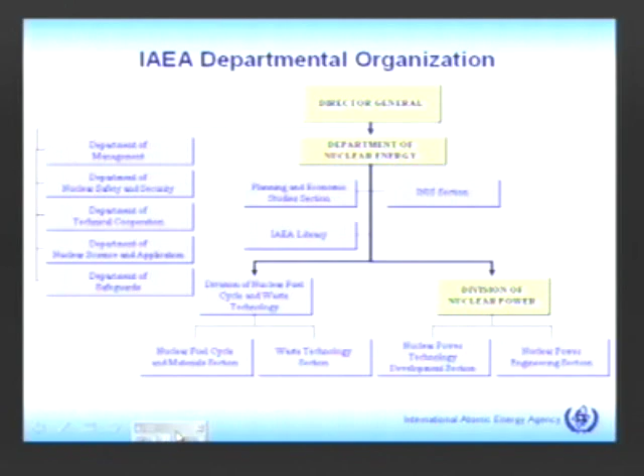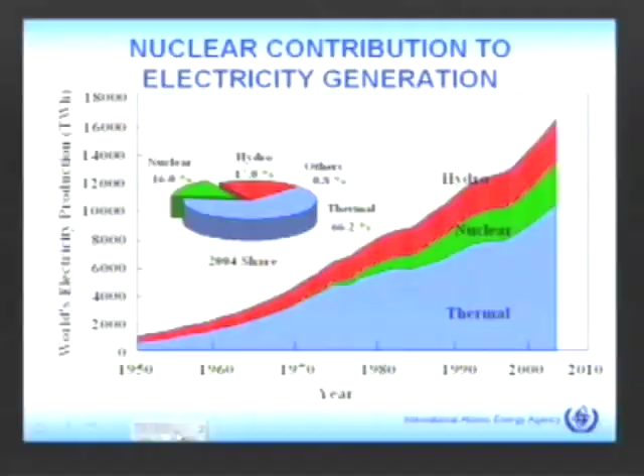Now moving to the main part of my talk. In looking at today's development of advanced reactors, I think it's interesting to start and look at the world's electricity generation since 1950 until now. I chose 1950 because I was a young boy then. In terms of terawatt hours - a terawatt hour is a billion kilowatt hours - in 1950 the world had about 1,000 terawatt hours being generated of electricity per year. Now, just during my lifetime, we have more than 16,000, an increase of more than 16 times. Nuclear today produces 16% of the world's electricity, which is more than the whole world had in 1950.

This shows the numbers of nuclear plants operating in various countries. The U.S. has the most with 104. Globally, there are 441 nuclear power plants with a capacity of 367 gigawatts, and 26 more are under construction.

And significantly, there's been quite a bit of experience: 11,600 reactor years. That's a lot of experience that the industry has.

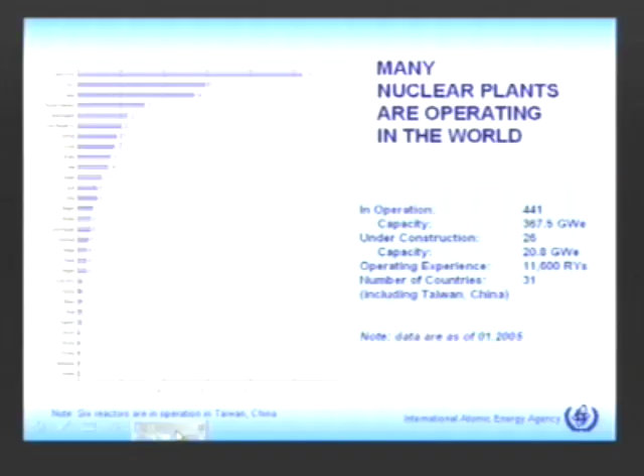Based on information from our member states, we predict that nuclear power will grow. Some countries do have phase-out policies, Germany for example. But other countries see advantages in nuclear power for energy security, electricity price stability, and greenhouse gas reduction. And some countries plan to increase their nuclear capacity, for example China, India, Japan, Republic of Korea, and Finland.

Based on the information on future plans in the various countries that are members of the IAEA, we predict growth from the current value of 2,600 terawatt hours per year to the numbers summarized at the bottom of the chart.

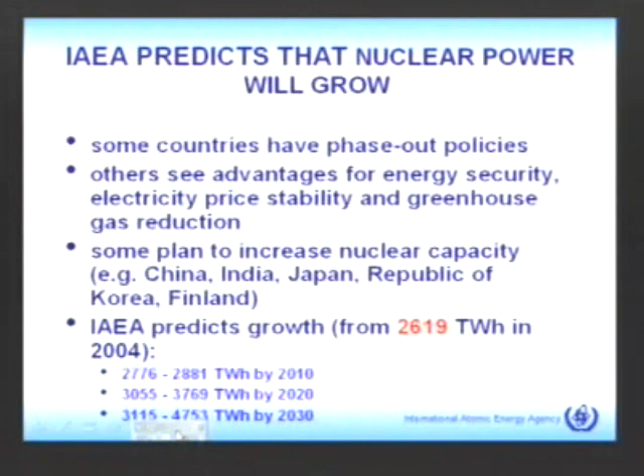Now, we're not the only organization that predicts nuclear power will increase. The Intergovernmental Panel on Climate Change, a scientific advisory group to the United Nations Framework Convention on Climate Change, also predicts nuclear power will grow.

They've analyzed many scenarios, from rapid industrial development in developing countries to slow development, so their ranges for future nuclear capacity are wide, shown by these yellow bars. We simply plotted the median in this black line, and you can see that's a pretty significant increase out to 2050 from today's installed capacity.

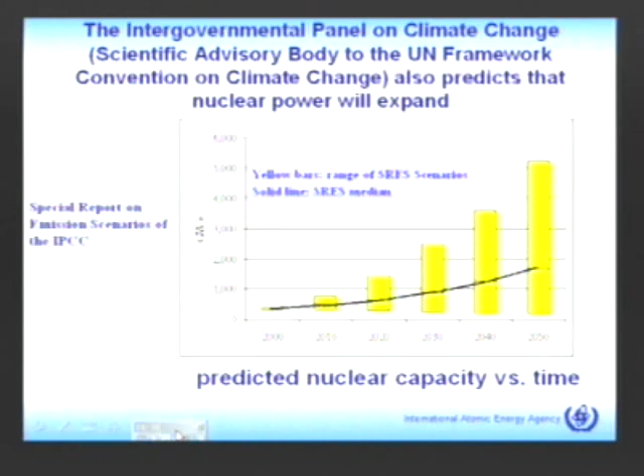But we realize the future is hard to predict, so I thought it would be interesting to list the factors that will influence the future contribution nuclear power makes to electricity production. One factor is the degree of global commitment to greenhouse gas reduction. Certainly important are continued vigilance in safety and safeguards, the maturity of the technology, implementing high-level waste solutions, and public perception and education.

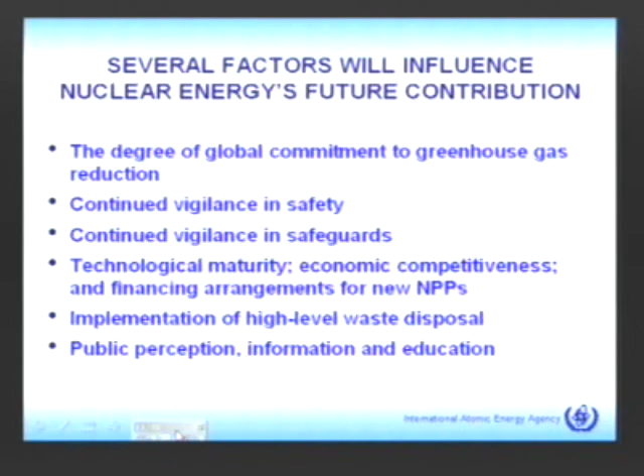I want to say a few things about the economics of nuclear power, because that's an important area for design organizations developing new plants. We did a study recently of the means for improving economics while meeting the very stringent safety requirements we have today.

This was a collaborative assessment involving several industrial organizations and government agencies, and we got good input from the European Commission and also the OECD Nuclear Energy Agency.

We took a quick look at the economics of current plants, and we find that in general they're operating very well. Many have already been paid for, they're amortized, so they can generate power simply by buying the fuel and paying for operation and maintenance costs. They don't have to pay for their capital costs, that's already paid. Many are achieving high availability.

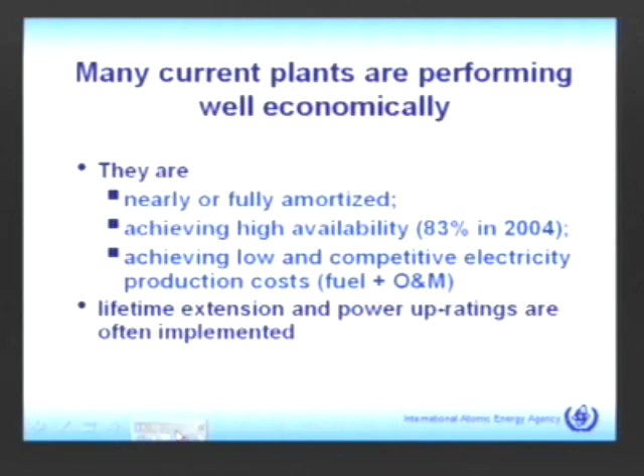The global average availability in 2004 was 83%, and the U.S. did even better at 92%. These plants are achieving low and competitive electricity production costs, meaning fuel costs and operation and maintenance costs. So in the U.S., but also in other countries, lifetime extension and power uprating are pursued because these plants are performing so well.

But you also realize there are fewer nuclear plants being built. I tabulated here: during the 1970s, there was an average of 25 construction starts per year. Then back to 1998, you see construction starts per year are 3 or 5 or 6 or 1. This year there have been 2 starts up until August of 2005, one in Pakistan and one in Finland.

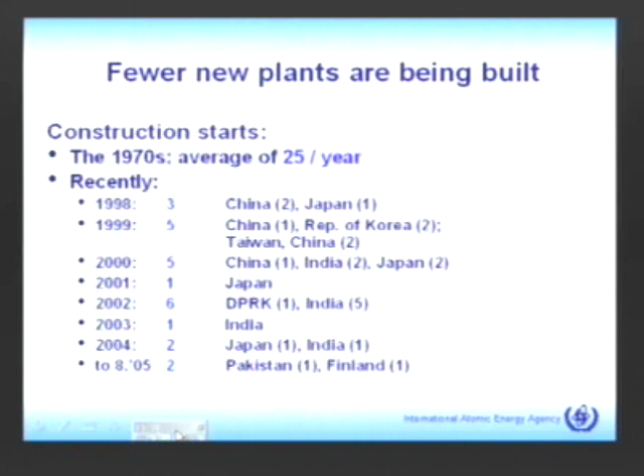So for new plants, there are economic challenges. The market deregulation in some countries means owners of those plants are no longer guaranteed they can pay for their plants through a long period of regulated rates. It's a competitive industry now.

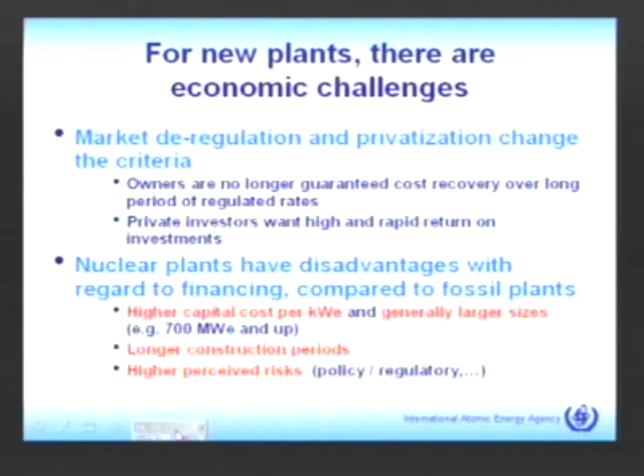And nuclear plants have disadvantages with regard to financing compared to fossil plants. There are 3 factors contributing to that. First, most nuclear plants are large, meaning above 700 megawatts, which is the IAEA definition of a large-sized plant.

Of course they cost more per kilowatt electric, so when you combine that large size with the higher capital cost per kilowatt electric, you get a lot of money that needs to be financed when an owner wants to buy a new plant. Secondly, nuclear plants take longer to construct than fossil plants, and they do have higher perceived risk, either from changing government policies or regulatory delays. So they have these disadvantages with regard to financing.

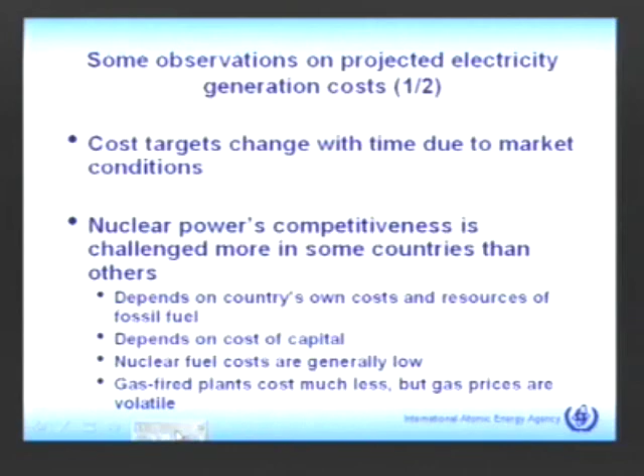Some more observations. The cost targets for what is competitive for nuclear plants against fossil alternatives actually change due to market conditions. A good example is the United States. Back in the mid-1980s, the Department of Energy started the Advanced Light Water Reactor program, and at that time we thought the target to be competitive was about 4.3 cents per kilowatt hour. By the time those plants got developed and certified by the Nuclear Regulatory Commission, the target had dropped toward 3 cents per kilowatt hour. So targets do change with time, and it depends on conditions in each country. Some countries can be more competitive than others because of what they have to pay for fossil fuels and various factors. It's a country-dependent kind of thing.

Some more observations. In this assessment, the experts concluded that electricity production costs—fuel cost and operation and maintenance costs—are not likely to fall much below the current best experience of 1.1 to 1.2 cents per kilowatt hour. So design organizations have clearly focused on reducing capital cost. A lot of design organizations now say their target is about $1,000 per kilowatt electric for capital cost. That's an overnight cost, which does not include interest on money borrowed during construction, and doesn't include owner's costs. But the target of about $1,000 per kilowatt would meet about 3 cents per kilowatt hour, which is agreed to be very competitive with fossil alternatives.

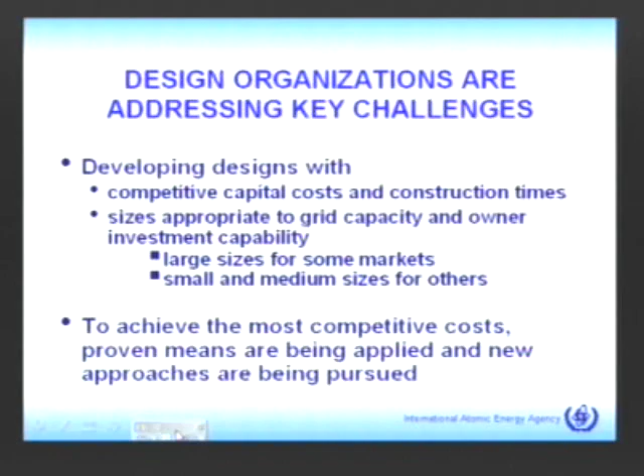The design organizations are working to meet those challenges. They're developing designs, trying to have competitive capital costs and short construction times. They've realized that one size doesn't fit all. Some markets, like France or Finland, need large size plants. But in other markets, as we see from Vienna, some developing countries are interested in small or medium sized plants. Our definition of small is 300 megawatts and below, and medium is between 300 and 700. So design organizations are developing plants throughout those ranges. They realize that to achieve competitive costs, they have to apply proven means the industry has already learned can keep capital costs down, but also pursue new approaches to reduce cost.

This expert group has examined that. Back in 2000, the OECD Nuclear Energy Agency produced a very good report reviewing proven means for reducing capital cost of new plants, and you've probably seen these kinds of lists before. Certainly countries moving forward with nuclear power are doing it through standardization, designing a plant and building replicates. Japan is doing that, Korea is doing that, India is doing that. That's a proven means for keeping cost down.

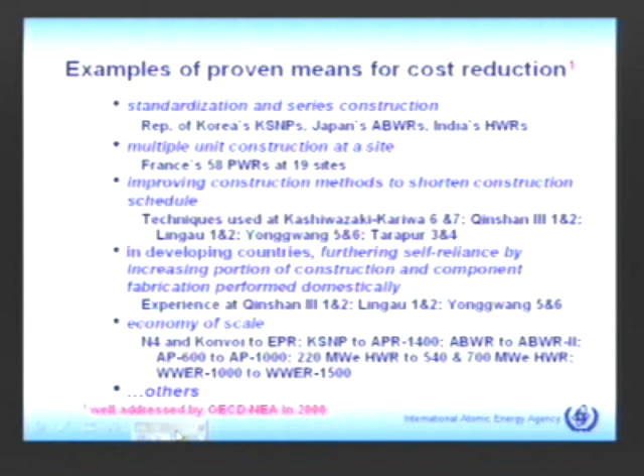Building more than one unit at a site is also a proven means, taking advantage of the workforce, their knowledge and training. France is a good example—they built 58 pressurized water reactors at 19 sites. I've mentioned keeping the construction schedule short, meaning good techniques for constructing the plant. I list some recent plants that started up since the mid-1990s, and they all achieved very good short construction schedules. Something important to developing countries that we see in Vienna: when a developing country buys a nuclear plant from a vendor in another country, they like to increase self-reliance by building some components and systems domestically. That helps them keep costs down.

Also, economy of scale is a key way to achieve competitive capital costs. You see that in countries moving forward with nuclear power. In India, they have a series of 220 megawatt electric units, and they recently started up a 540 megawatt electric unit, which gave them economy of scale. They're doing design work on a 700 megawatt electric unit.

The European Pressurized Reactor, developed by France and Germany, takes advantage of the most recent series of pressurized water reactors in those two countries to develop a larger size plant. That's also true in Korea—they've used economy of scale from their standardized 1,000 megawatt electric plants, and now they're planning to build a 1,400 megawatt electric plant. It's true in the United States too: Westinghouse has certified their 600 megawatt electric passive reactor, the AP600, but to get economies of scale, they're working on certifying a 1,000 megawatt electric plant.

But we also took a look at what are these new approaches that are being pursued. One that you hear about a lot for small and medium-sized reactors is to modularize the systems, to build them in a factory so that they can have short construction time.

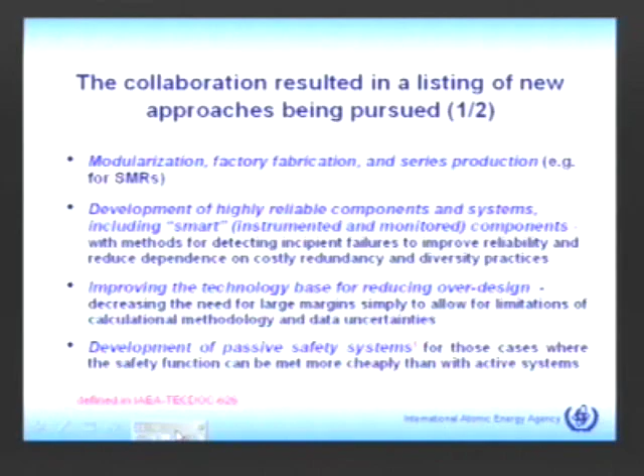And one approach that many organizations are pursuing is to develop passive safety systems for new reactors, where the passive systems are based on natural laws of physics instead of active pumps and components that can operate in case of an emergency. But for those cases where the safety function can be met more cheaply, some design organizations are pursuing passive systems.

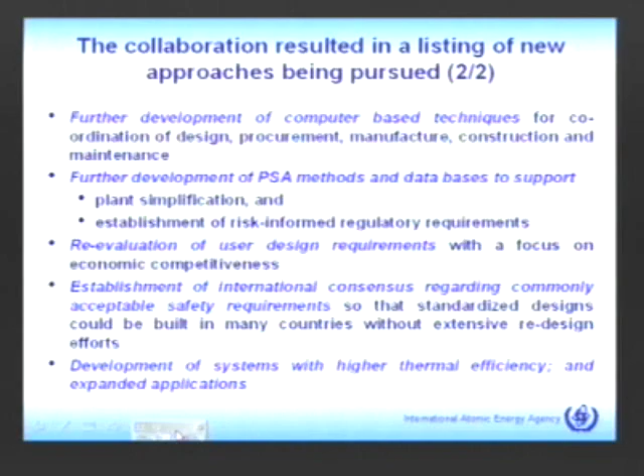And finally, development of systems with higher thermal efficiency. I'm going to give you some examples of that. And expanded applications, I'm going to also give you some examples of that. Okay, let me move now to some examples.

Development of advanced designs, that's going forward for every reactor type: light water reactors, heavy water reactors, gas-cooled reactors, and fast reactors. It's often guided by what we call user requirements documents, where utilities will come together and write what they would require for the next plant.

The new designs incorporate the large experience I mentioned from the current plants, over 11,000 reactor years of experience. They also incorporate technology advancements and results of R&D.

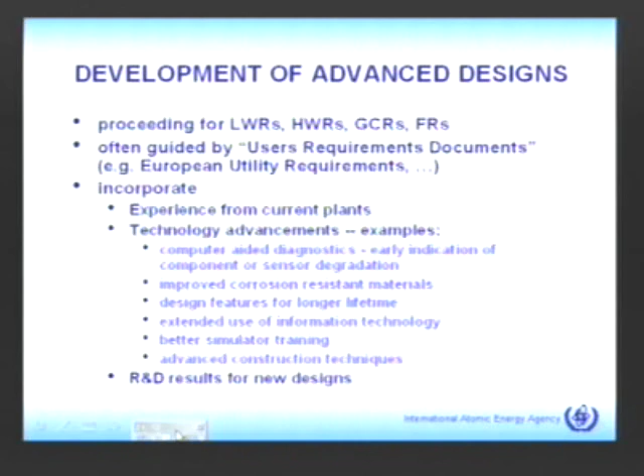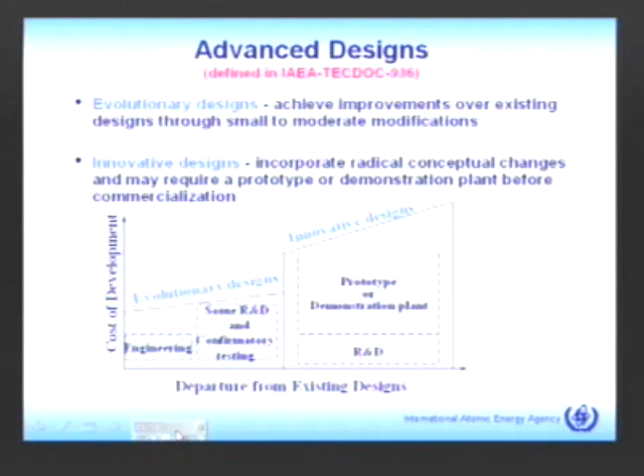When we speak about advanced reactors, and our definition is pretty much accepted by organizations around the world, we break that into two categories. We speak about evolutionary designs, which achieve improvements over current plants through some small to moderate changes based on experience. And then we speak about innovative designs, which are more radically different from today's plants, but they may cost more to develop, and they may require a prototype or a demonstration plant before they can be commercialized. I'm going to give you examples of both of these.

And when you study the design approaches that the design organizations are taking, you can see that they're meeting very stringent safety requirements. There's a reduction of the operator burden, the operators not needing to react so fast as they would have in the past. There's incorporation of either highly reliable active safety systems, or in some cases, designers are pursuing this new approach, passive safety systems. They're all pursuing to reduce the core damage frequency.

The new designs have a very, very low core damage frequency that's predicted. And they're trying to assure that there's very low releases in the event of a severe accident, so that the emergency planning can take that into account.

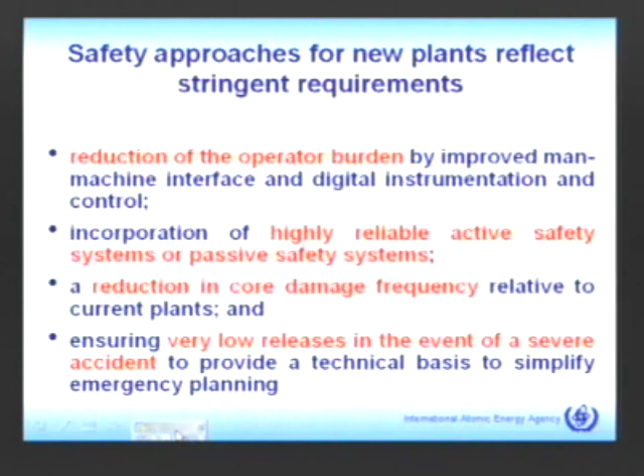Well, I wanted to list here several evolutionary light water reactor designs. There's a lot of work going on around the world on these plants. I won't go through each one, but I wanted to show the countries that are doing this work toward evolutionary water-cooled reactors, light water reactors, and the organizations involved, the industries involved.

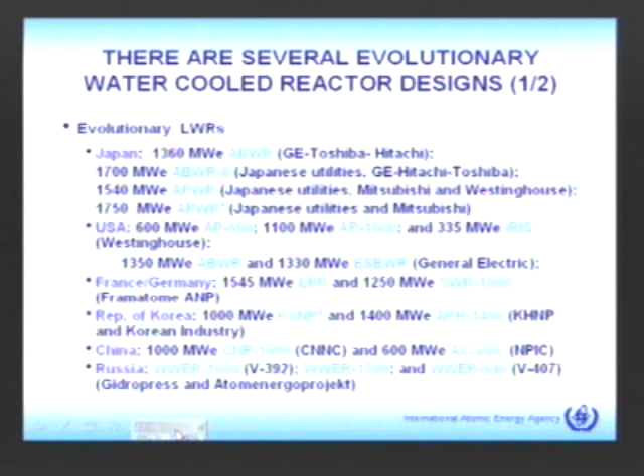Just to point out, in the United States, the AP 600 megawatt electric passive plant by Westinghouse and the advanced boiling water reactor by General Electric have been certified in the late 1990s by the U.S. Nuclear Regulatory Commission. And now Westinghouse is working to certify by the end of this year to scale up the AP 1000. And General Electric is working to get a design certification for their ESBWR, which is a passively safe plant. But this kind of work is going on in many countries, as you see here.

That was for light water reactors. This chart is for heavy water reactors. The development work on heavy water reactors is done mainly in Canada and in India. Atomic Energy of Canada is working on an advanced CANDU reactor that's light water cooled and heavy water moderated. And India, I believe I mentioned already, has recently started their first evolutionary 540 megawatt plant, which was based on their successful 220 megawatt electric series. And they're doing design work on an evolutionary 700 megawatt electric plant.

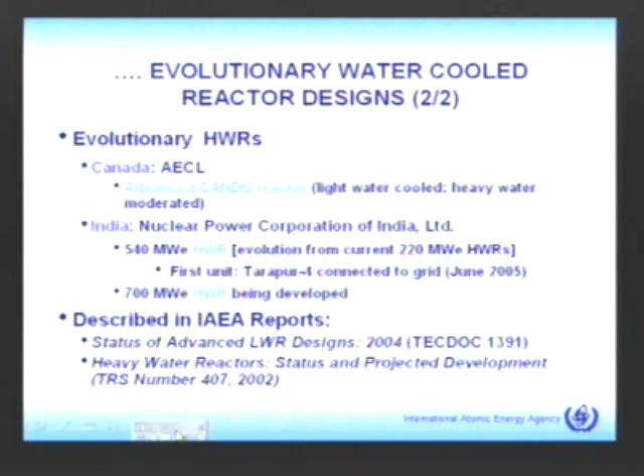I want to give some more examples here of the advanced boiling water reactor that's been developed by General Electric, Toshiba and Hitachi. Development of advanced plants takes quite some time. The development of this plant started in the 1970s because the Japanese had a very strict principle of testing new features before they were incorporated into the design. Even if those new features might have been used in another plant somewhere else in the world, they were sure to very carefully test any new feature because they wanted their plant to operate with high availability once they built it.

I list some of the key developments: reactor internal pumps, I'll show you that, and a higher improved efficiency turbine. Now the U.S. version of this advanced boiling water reactor was certified in 1997 by the Nuclear Regulatory Commission.

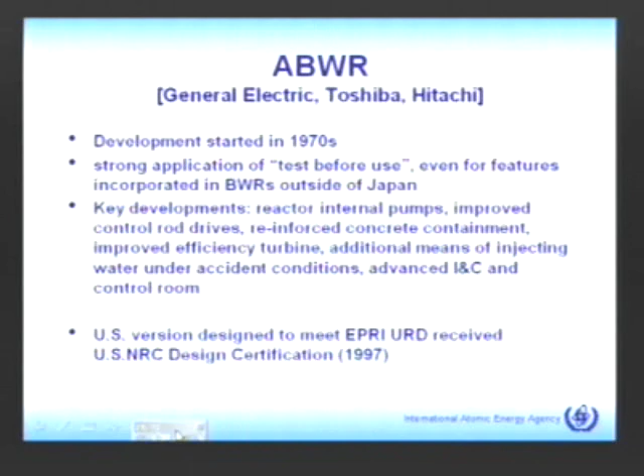Actually, these advanced boiling water reactors are becoming a standardized series in Japan. Right now there are 3 plants operating. The first one started in 1997, Kashiwazaki Kariwa Unit 6. Recently, this year, Hamaoka 5 started up, and there's a 4th one that's been connected to the grid and will go into commercial operation soon. So they're becoming a standardized series.

And more projects are underway in Japan. There are 8 more projects for advanced boiling water reactors that are in various stages, ranging from planning to environmental impact statement being submitted or the construction permit issued. And there are 2 more under construction in Taiwan, China.

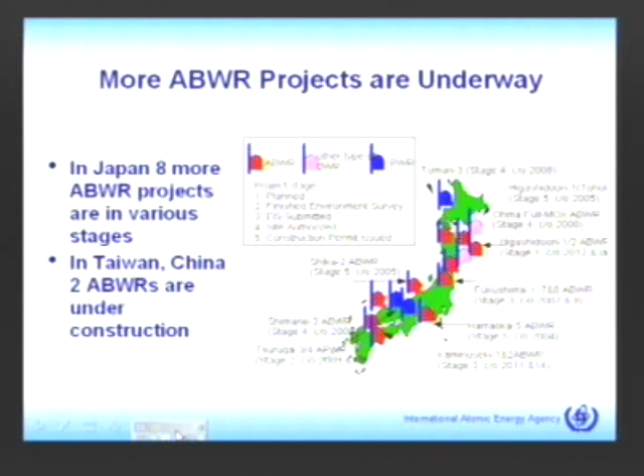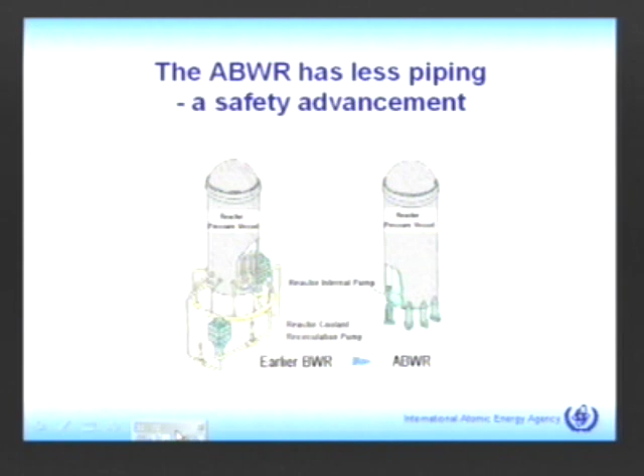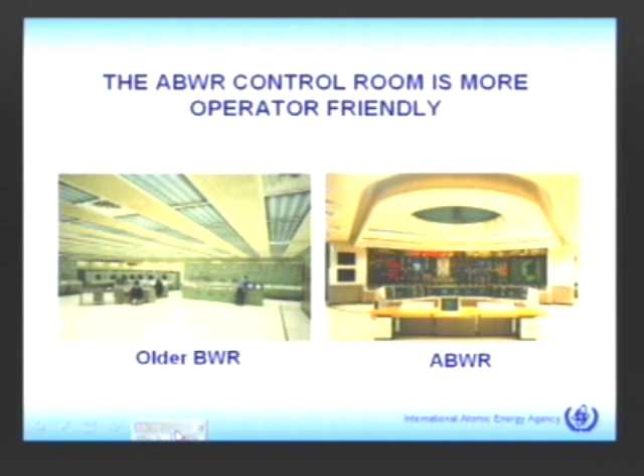And they achieved a 48-month period from pouring first concrete to start of commercial operation. This is all good for the economics of the plant, because then they begin to get the revenue much quicker.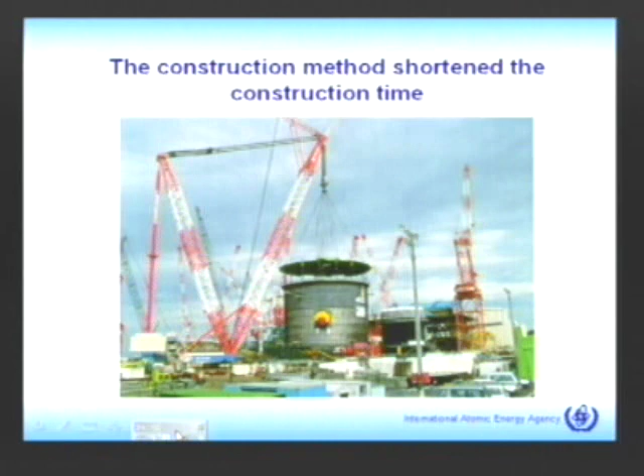And because of the good experience they've had with the ABWR, these are 1,360 megawatt electric units. They've already started work toward their next evolution, an evolutionary design we call ABWR2, which would be at 1,700 megawatts electric. This is an activity of TEPCO and 5 other Japanese utilities working with reactor design organizations. Their goals are to reduce the capital cost, reduce the construction time, also make them more flexible for use of different fuels, mixed oxide, plutonium-uranium mixed oxide. And they see that these can be introduced commercially in the late 2010s.

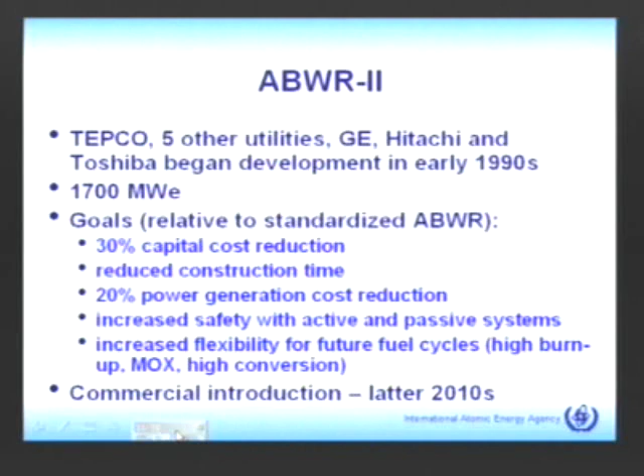I mentioned that some design organizations are utilizing passive safety systems. The ABWR2 is one example where it has a passive core heat removal system and a passive containment cooling system. It doesn't require any emergency diesel generators or emergency pumps to act. It can either cool the core in the case of the core heat removal or cool the containment just by natural circulation.

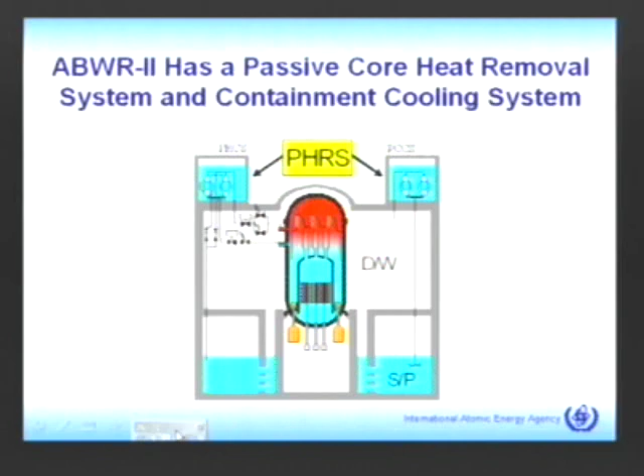I want to move now to Europe. Framatome has developed the European pressurized water reactor at 1,545 megawatts. It relies primarily on well-proven active systems to achieve a high level of safety. It has 4 independent 100% capacity emergency core cooling trains.

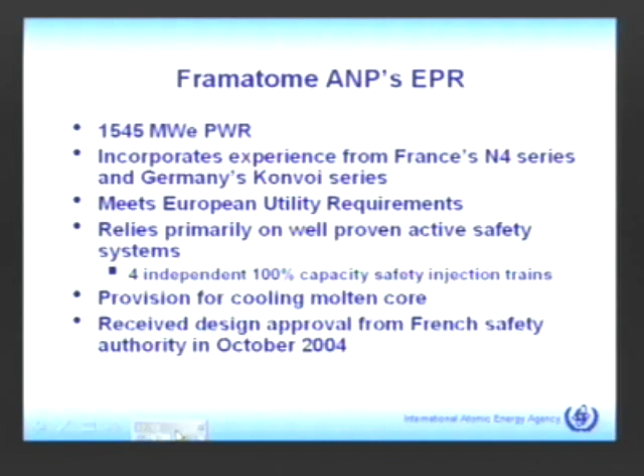It even has provision for cooling a molten core in the very, very unlikely event that the core should melt. I'll show you a picture of that. And it's been approved by the French Safety Authority in October of last year.

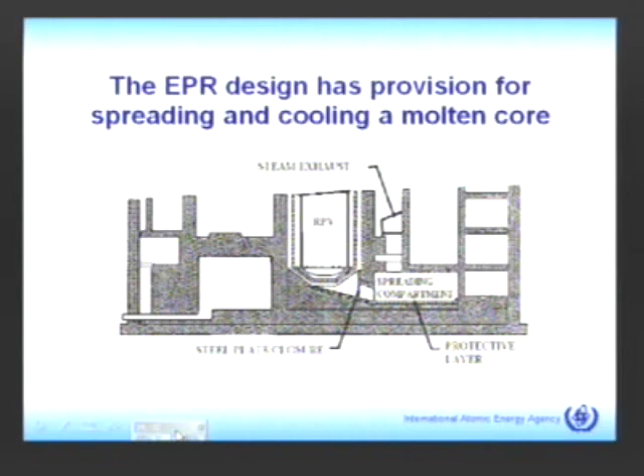This is a picture of their severe accident management system. It's very, very unlikely that the core would melt because of all their emergency cooling trains and their highly reliable systems. But in the event that it would melt and melt through the reactor vessel, they have a spreading area where they can spread the core and maintain it in a coolable geometry. So they've really taken very, very extreme steps to protect against accidents.

And we're excited in Europe because now these plants are actually becoming a reality. I show on the left side of this slide the picture of the first European pressurized reactor being built in Finland. I have a picture here of the site excavation. In the background, you see the existing 2 boiling water reactors at that site. And the first concrete was poured in July of this year, so the construction has started. On the right side, there's an artist's concept of what it will look like when it's complete.

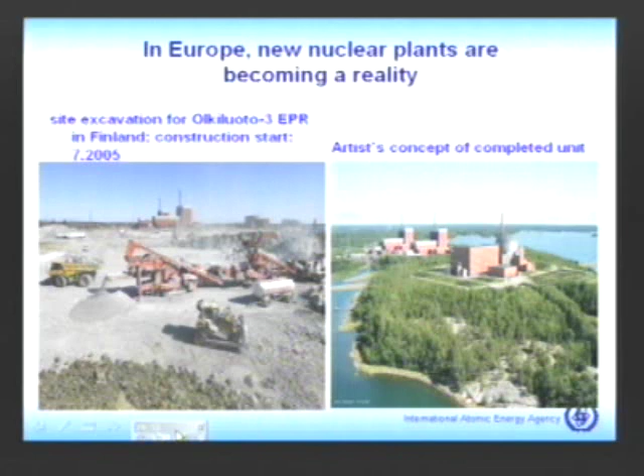I mentioned earlier in my presentation what are the reasons for nuclear power in the future. TVO, the utility that's going to operate this new plant, already operates the 2 BWRs that are there. They've publicly stated the reasons that supported their decision to buy a new nuclear plant. I thought it's interesting to take a look at that.

They said it covers partly the additional electricity demand, and they need to replace some old fossil-fired power plants. Importantly, part of their decision was to meet their Kyoto commitments for greenhouse gas reduction, because nuclear plants don't produce any greenhouse gases. So they actually stated that as one of their key reasons.

I mentioned earlier that nuclear power can provide stable electricity prices. That was one of their reasons. And they wanted to reduce their dependence on electricity imports, sort of an energy security approach.

Moving now to Korea. They're scaling up from their standard pressurized water reactor, which is 1,000 megawatts. They've designed a 1,400 megawatt electric plant. It's been certified by their regulatory agency, and they plan to construct the first 2 units at a site called Shinkori.

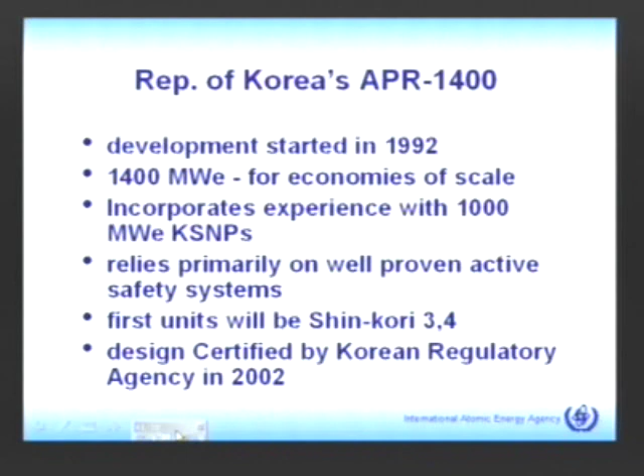Moving to the United States, I mentioned already the passive design, the AP600. This was developed by Westinghouse during the Advanced Light Water Reactor Program of the U.S. Department of Energy, and certified by the regulator. Their key developments include passive systems for the various safety functions. In the very unlikely event of a core melt accident, they can even retain the molten core inside the reactor pressure vessel. And they have demonstrated these new passive systems by test.

Similar to what the Japanese did with their ABWR, they wanted to very thoroughly test the systems before actually incorporating them into a new plant, because that's important. You don't want the new plant to operate at some low availability just because you didn't very well test the system. I mentioned that they realized that they needed to pursue economy of scale to meet competitive cost targets.

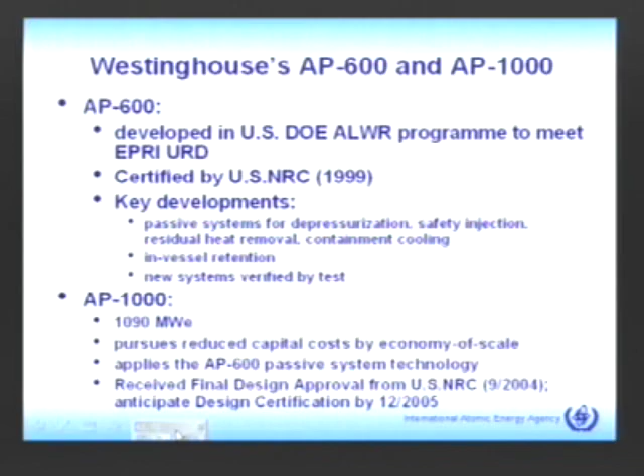Therefore they're in the process of getting their 1,000 megawatt electric plant certified by the Nuclear Regulatory Commission. They apply the same passive system technology that they had developed already for the AP600, and they expect to have that certified by the U.S. Nuclear Regulatory Commission by the end of this year.

This shows a diagram of one of their passive systems for cooling the containment and condensing the steam inside the containment in the event of an accident, a loss of coolant accident where steam is injected into the containment. It's a natural circulation system of air coming in and cooling the containment wall just through natural circulation. That can be enhanced by a water spray on top of the containment. So it's completely passive, it doesn't need emergency diesel generators or emergency pumps to operate.

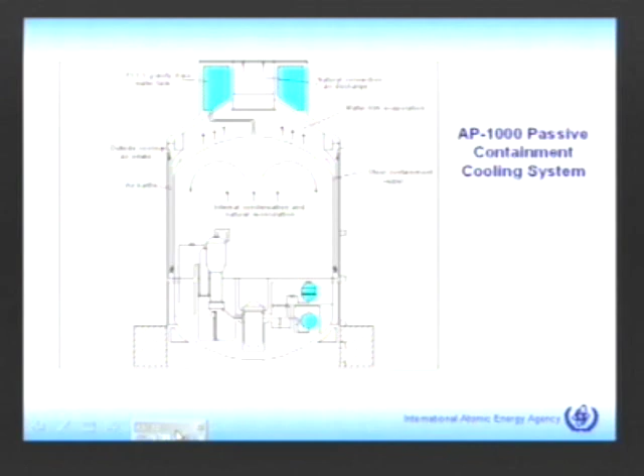Several design organizations are taking that approach. What I've said now has dealt with what we call evolutionary reactors. Now I want to give you some examples of innovative reactors. That development is also going on for every reactor type: light water, heavy water, gas-cooled, and fast reactors.

A lot of the designs that are innovative are in the small to medium size range, up to 300 or between 300 and 700 megawatts electric. The reason for that is developing countries may want to start with a small to medium sized reactor. They're smaller, they're easier to finance. So that's a factor in some developing countries that want to start a nuclear power program.

Nuclear power in the U.S. was started with small reactors. They can have a simple design because they're small. They can employ passive safety systems. And many developing countries see these as something that they could use for what we call non-electric applications.

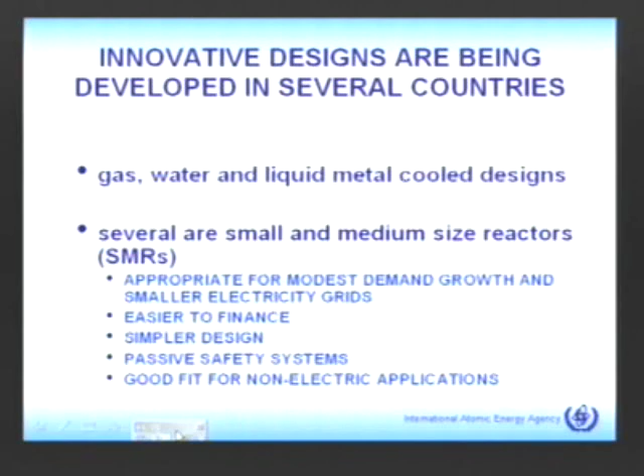I'm going to give you some examples of applications of nuclear energy beyond making electricity, which I've talked about up until now. But first, let me give you some examples of some innovative water-cooled reactors.

One type of innovative water-cooled reactor is a design for conversion of thorium-232 to fissile uranium-233, or for conversion of uranium-238 to plutonium. I give two examples here. This is to address energy sustainability goals. If you can breed a lot of new fissile material from the fertile thorium-232 or uranium-238, that can help countries meet their sustainability goals.

One example is India's work on what they call their advanced heavy water reactor. They intend to fuel that one with thorium oxide so that they can breed uranium-233 as a fuel. They have a lot of thorium deposits in India.

This is a vertical pressure tube design. Normally, heavy water reactors have a horizontal pressure tube. These pressure tubes are vertical so that they can achieve core cooling during normal operation by natural circulation.

Other designs for high conversion are being developed in Japan. Those are being developed to convert uranium-238 to plutonium, and they're building on the experience of the ABWR. They changed the core lattice, but they keep the balance of plant similar to what the ABWR has because they've had good experience with the ABWR.

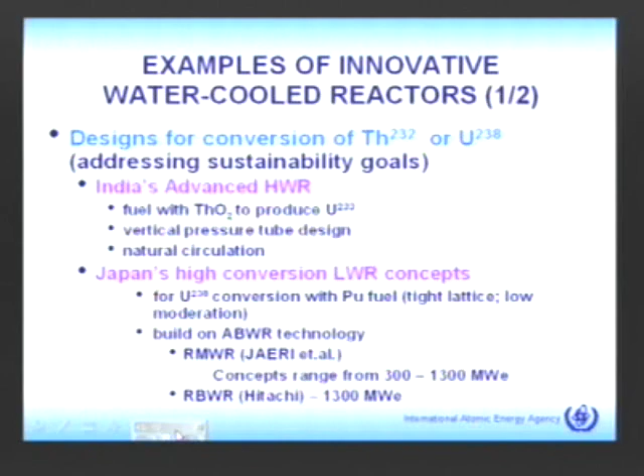Some more examples of innovative plants, what we call integral designs. These are small to medium-sized plants where the reactor core and the steam generator are in the same reactor vessel, instead of having the steam generator in a different vessel. Several countries are developing integral designs: Korea, Argentina, Russia, and Japan.

Westinghouse is also developing an integral design, but they claim it's evolutionary instead of innovative because they believe they won't need to have a demonstration plant before they commercialize it, so that's why it's not listed here.

But these integral designs are generally small. That means below 300 megawatts. And I'll show you that some of them are designed for both electricity production and seawater desalination.

But another innovative design is a water-cooled reactor that operates thermodynamically above the critical point of water. That's above 22 megapascals and 374 degrees Celsius. This is an approach pursuing higher thermal efficiency. This approach promises higher thermal efficiency in the range of 44 to 45%, compared to current day light water reactors that have between 33 and 35%.

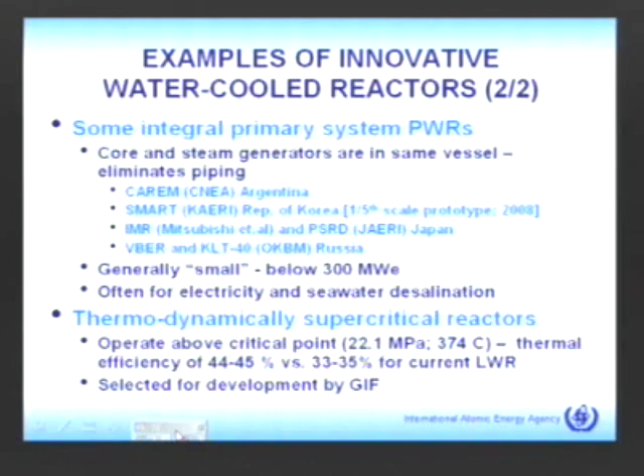In fact, this is a design that's been selected for development by the Generation 4 International Forum, a development program, which I'll tell you about in a moment.

I want to move now away from water-cooled reactors and talk about the other reactor types: gas-cooled and, in a moment, fast reactors. With regard to gas-cooled reactors, there's a reasonable number of years of experience, 1,565. In fact, most of the nuclear electricity in the United Kingdom is generated by their 26 gas-cooled reactors. These are cooled by carbon dioxide. These carbon dioxide cooled reactors have also operated in some other countries, as I list.

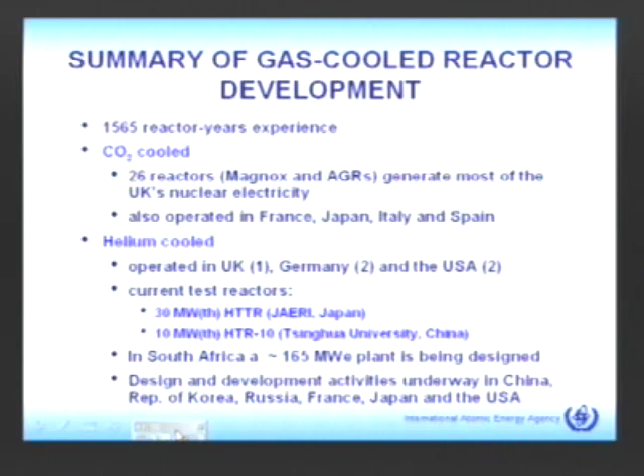More recently, the development work has been on helium-cooled reactors. Helium is an inert gas, and therefore you can operate reactors at higher temperatures, and there's no reaction with the core structure as there would be with carbon dioxide. There have been 5 of those reactors that have operated. Those are now shut down, but there are 2 test reactors that are operating, helium-cooled, high-temperature test reactors. They operate up to 950 degrees Celsius.

One is a test reactor in Japan, I'm going to show you a picture in a moment. And another one is a test reactor in China. There's also work in South Africa, I'm going to show you a picture. They're developing a small-sized plant with helium coolant. And I list some other countries where development work is also going on.

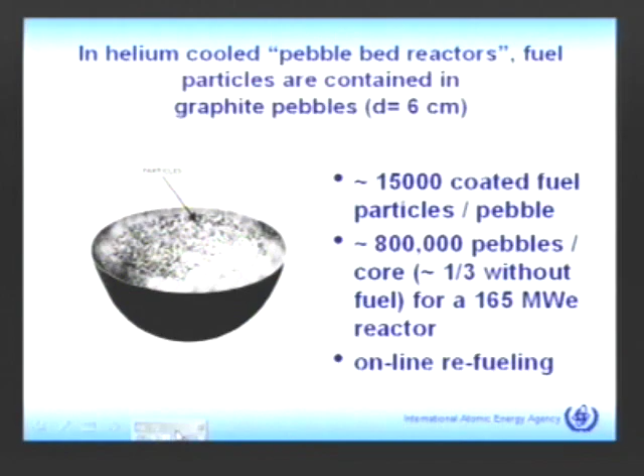You may have heard about the pebble bed version of these high-temperature gas-cooled reactors. This shows a picture of the fuel. The fuel is contained in billiard ball size graphite pebbles. The fuel itself is in very, very small particles, 15,000 per pebble, and it has coatings on it which will retain the fission products up to high temperatures. So that's one way that these reactors get a very high degree of safety, through these coated fuel particles that can retain the fission products.

A small plant would have very, very many pebbles. And another factor that you often see about these plants, they can be refueled online. The pebbles are put in at the top of the core, and pebbles are then taken out later on at the bottom of the core.

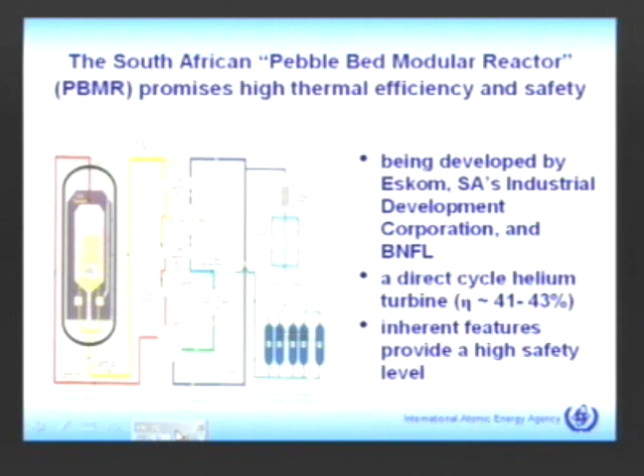This is a picture of the design being developed in South Africa. It's different than a light water reactor that makes steam to go to a turbine. This takes the hot helium, at, for example, 850 Celsius, and it goes directly to a helium turbine. And this gives a higher thermal efficiency than the light water reactors. They predict a thermal efficiency of 41 to 43%.

And they do promise a very high degree of safety. Number one, because of these coated fuel particles that can withstand high temperatures. Number two, because the core has a lot of heat capacity in it, a lot of graphite that heats up very slowly because of this large heat capacity. They also have a very low core power density, on the order of 6 watts per cubic centimeter, compared to today's light water reactors, which have about 100 watts per cubic centimeter.

Okay, I want to turn now to fast reactors. The history with fast reactors: there were test and experimental reactors operated in the countries I listed. This led to demonstration and prototype liquid metal cooled reactors that have operated in several countries: France, UK, Kazakhstan, Russia, Japan, and France. The French plant was a large size plant at 1,200 megawatts. It's recently been shut down and it's being decommissioned.

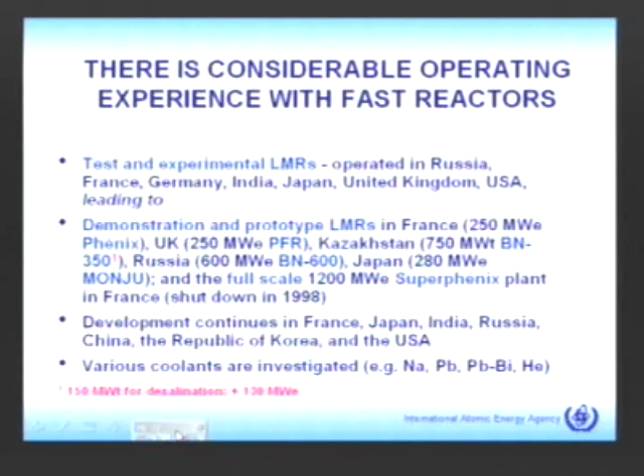The development work continues, and various coolants are investigated. Most of these fast reactors are designed and have operated with sodium coolant, but also lead and lead bismuth eutectic, and also gas helium is being examined as a coolant for fast reactors.

This chart just summarizes the work in various countries. Some of you may remember that the Monju plant in Japan was shut down due to a sodium leak in 1995. The Japanese now are planning to restart that plant in 2008. India is operating a test reactor and constructing a larger prototype plant. Russia is operating a plant. I'll show you a picture of some construction in China. The US and Korea are developing fast reactors also.

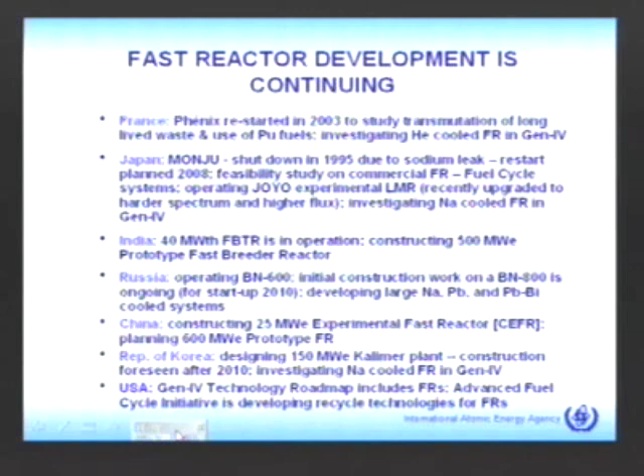And we see various roles for fast reactors. The traditional role was to breed fissile material, either by converting U-238 to plutonium or thorium-232, converting it to uranium-233. Fast reactors are also good for incinerating plutonium, and they're good for transmuting the long-lived radioactive waste, both the fission products and the actinides.

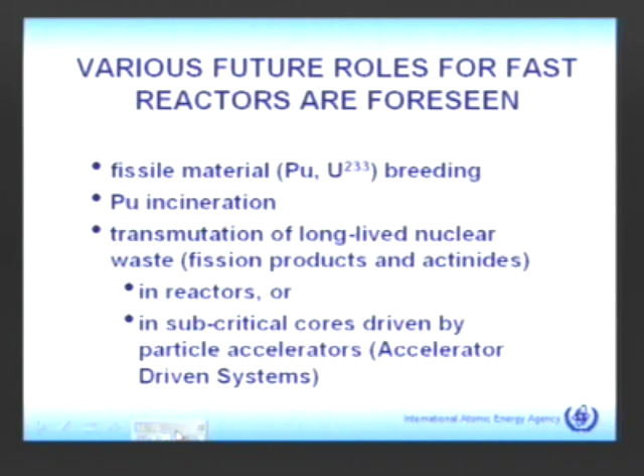That can be done either in a fast reactor or in what we call an accelerator-driven system, where the reactor core itself is subcritical, but it receives a particle beam to create neutrons and bring it to the critical state.

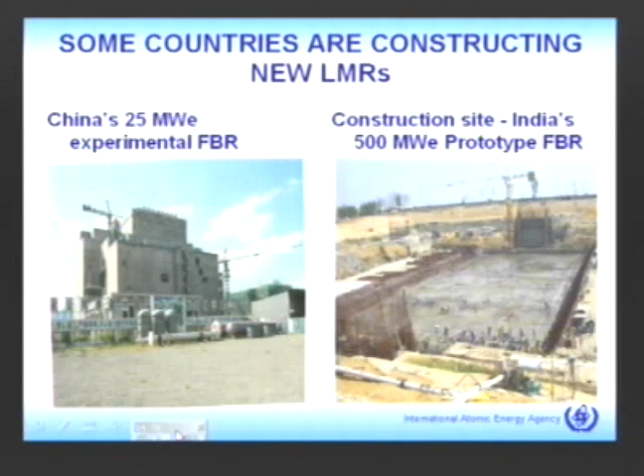I want to talk about two international efforts that are underway on advanced nuclear energy systems. The first is the Generation 4 International Forum that was started in 2000 and involves, I believe, 11 countries, mainly industrialized countries, including the US, of course.

They're developing new systems. They've stated what their goals are. Their goals come in 4 areas: sustainability, safety, good economics, proliferation resistance, and physical protection.

And they've actually developed a technology roadmap and selected 6 systems to develop cooperatively, working together, to be ready by 2030. Those systems are a gas-cooled fast reactor, a lead or lead bismuth cooled fast reactor, a sodium cooled liquid metal cooled reactor, the supercritical water cooled reactor that I mentioned that operates thermodynamically above the critical point, very high temperature reactors cooled by helium up to 1,000 degrees Celsius, and a molten salt reactor.

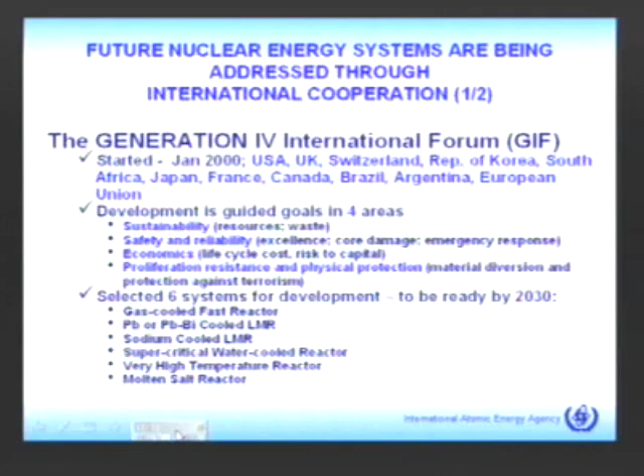At the IAEA, we have an international project called INPRO. You may have heard of this. That's an acronym for International Project on Innovative Nuclear Reactors and Fuel Cycles. We're looking both at reactors and fuel cycles to support the reactors.

This was started in 2000 because our General Conference adopted a resolution that said that we should do this. We now have 22 member states and the European Commission participating. I think it's interesting to look at what the resolution said the objective, the goals, should be: to help ensure that nuclear energy is available to contribute to fulfilling 21st century energy needs, and importantly, to bring together technology holders—those are the industrialized countries—and the users, to consider jointly the actions that need to be taken to assure that we can achieve this.

And up till now, they've developed a methodology that the member states can use to assess innovative nuclear systems. That means reactor and fuel cycle. And this methodology is currently being applied by several countries to examine innovative systems that could play a part of their future nuclear energy.

Okay, in just a few minutes that I have left, I want to talk about the non-electric applications. Up until now, I've discussed making electricity with nuclear power, and I told you that nuclear makes 16% of the world's electricity today. But if you look at the energy consumption, a lot of energy is used in the transportation field, and a lot of energy is used to make heat. And if nuclear can move into those areas, it has a lot of potential to expand.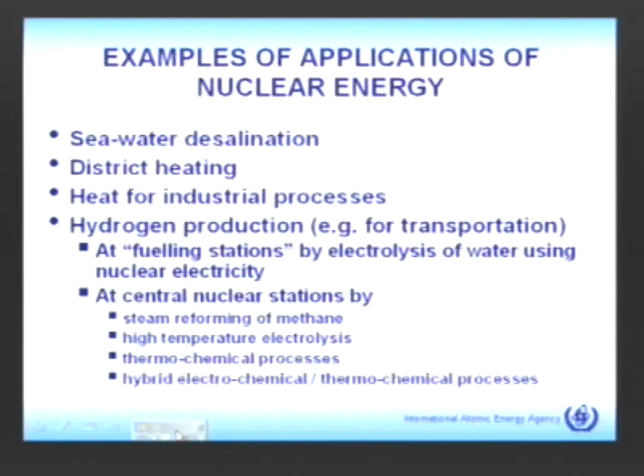I just listed some of the ways that nuclear can contribute to making hydrogen. It can do that today because it produces electricity at a low cost, and you can make hydrogen right at the fueling station by electrolysis of water. You can also make hydrogen at large central stations through different processes - high temperature electrolysis, thermochemical processes that have water as an input and hydrogen and oxygen as an output. So it's a very clean process. And then there are some processes that are hybrid, electrochemical, thermochemical. There's work going on in all of these areas.

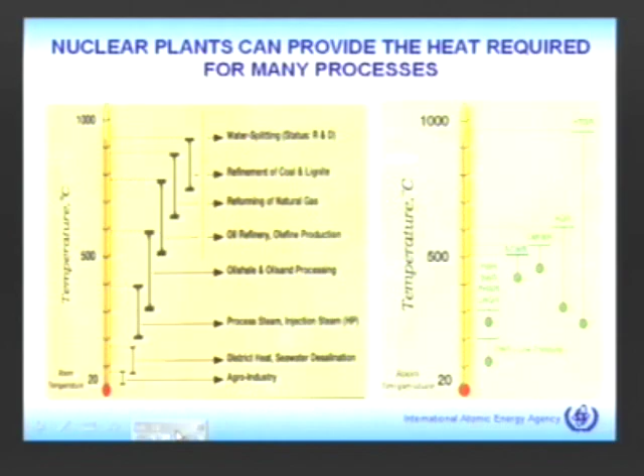It's interesting to take a look at the heat requirements of different applications. Starting at the low temperature end, district heating and seawater desalination don't take high temperatures. Moving on up, heat for industry, and at the very top, splitting water to make hydrogen and oxygen. Then you line that up onto the right side with the temperature capabilities of the different reactor types. The water-cooled reactors typically make temperatures in the range of 300 degrees Celsius. This supercritical water-cooled reactor being developed by Generation 4 can produce temperatures up to 500 Celsius. And the high-temperature gas reactors up to 1,000 Celsius. So you can match up the applications with the technologies to see how you can make these heat applications.

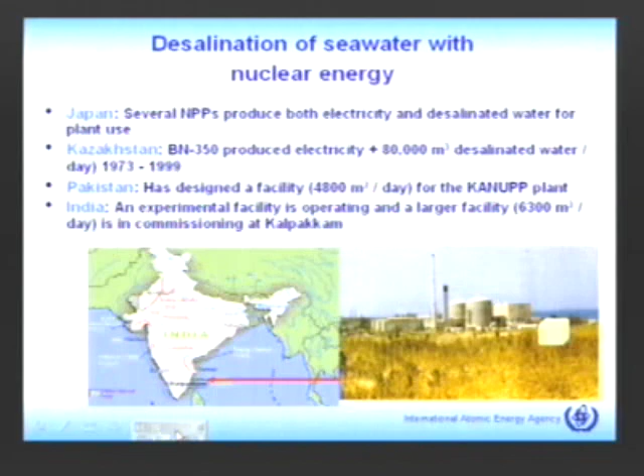Well, nuclear desalination of seawater is something that's already being done. Japan has several plants that produce electricity but also desalinate seawater, which they use internally for their own use. Kazakhstan operated a fast reactor, the BN350 liquid metal cooled fast reactor, until 1999, and it produced 80,000 cubic meters per day of desalinated seawater along with some electricity. Pakistan has designed a facility that they plan to connect to their heavy water reactor. India has an operating facility at one of their heavy water reactors, and another one is in commissioning phase. So we are moving forward with desalination of seawater.

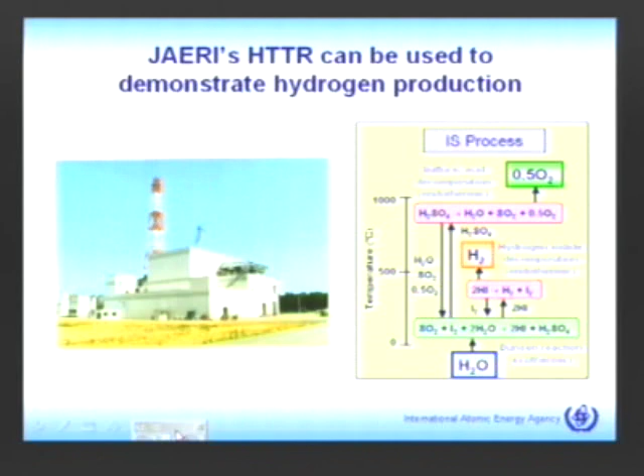In Japan, this high temperature reactor - a helium-cooled, graphite-moderated reactor - could be the first one to demonstrate nuclear production of hydrogen. A likely process is something called the iodine sulfur process, a chemical process where the input is water and the output is hydrogen and oxygen, so it's a clean process. Just last month, President Bush signed the Energy Policy Act to build a so-called next generation nuclear plant in Idaho. This plant would be intended to produce hydrogen and also electricity. That's an artist's picture of what that plant would look like.

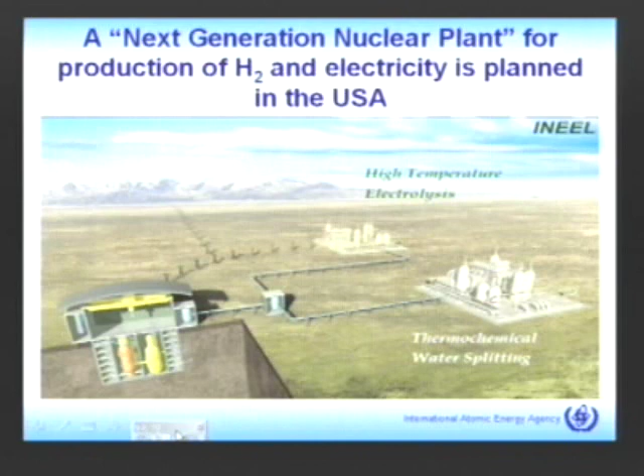That really completes my overview of global development. I wanted to say a few things about what we do at the agency. One thing we're able to do is see what's going on through contact with our member states - we see what's going on in reactor development around the world. That's one thing that's very exciting to me in working at the agency, to understand and see what's going on around the world.

And we feel like we're working toward nuclear power's renaissance. We believe there will be a renaissance in nuclear power. We had a large conference in Paris earlier this year, a ministerial level conference where we asked governments to come and tell us what their plans are for the future - what do they see? Many governments came and said they see nuclear as part of their future, not only the countries operating plants today, but also other countries that plan to implement a nuclear power program.

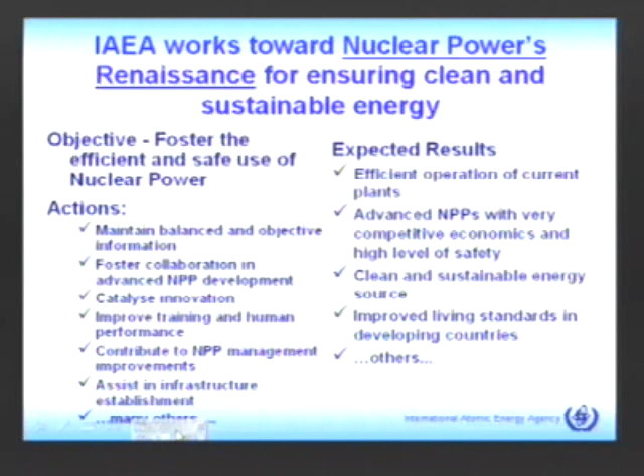For the operating plants, we have activities to improve the training of the operators and their performance, and we have activities to assure that they have very good management approaches. We also try to assist new countries that are planning to establish nuclear power with building the infrastructure they would need to implement a nuclear power program. So within our nuclear power division, we do all of these activities, and I would invite you to get onto our website and see a lot more details.

So I very much am glad that I could be here, and thank you for your attention. I'd be happy to answer some questions, try to answer questions.